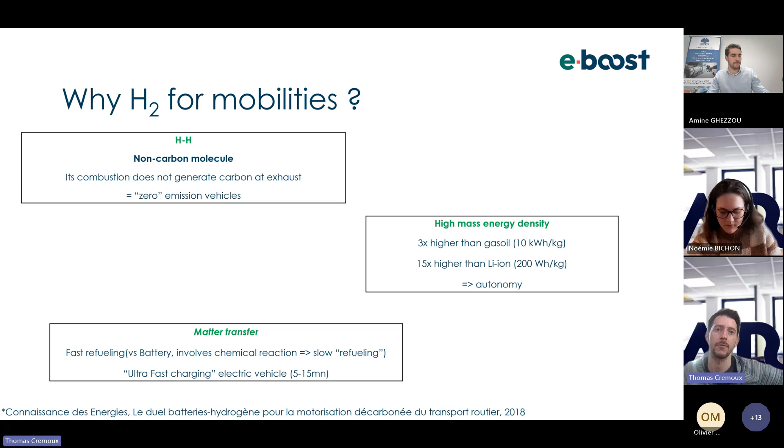These advantages make hydrogen useful for several uses. Hydrogen is not very relevant for light vehicles, except for taxis. But it will be more important for heavy vehicles, as we see on the graphs. Among these heavy vehicles, we have on-road and off-road engines.

And we don't have to forget that we have a part of hydrogen forklift vehicles, which have already been used for many years.

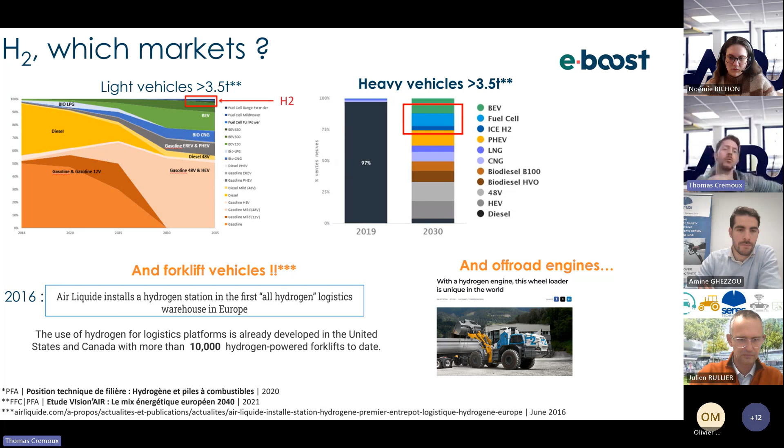But hydrogen has several challenges. The first is it needs a complete ecosystem: production, distribution with pipes, refueling stations, industrial and mobility consumption. It has a low chemical stability. As an example, low ignition energy, 12 times less than gas oil. So it has a chemical energy issue. Moreover, it has a physical energy issue because we have to compress it due to the low volumetric energy density, at 350 bars for example. And finally, the flame is not visible, the molecule is odorless, and the molecule is the smallest possible, so we have micropermeability. So we have to have special processes in industry to manage the hydrogen molecule.

So, with safety in mind, I give the floor to Amine, who will present.

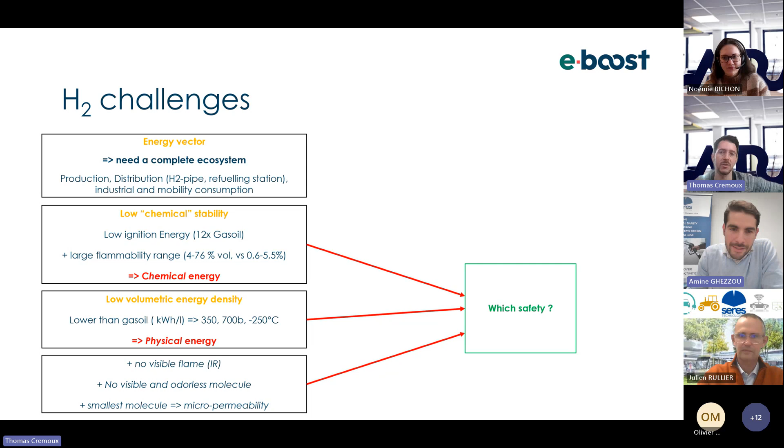Thank you, Thomas. Thank you, Noémie. Do you see my screen? Yes, it's okay. I will put it in full presentation. Is it full screen? Yes, yes, okay.

So maybe a short introduction about ourselves. I'm Amine, I'm a safety leader on hydrogen and automotive applications. I've been working several years on hydrogen storage systems, either on automotive, stationary, machinery, and transport of dangerous goods applications. Actually, I'm a safety leader on fuel cell hydrogen systems, and I'm working at Seres Technologies in the automotive department with Julien.

Hello everybody. So myself, I'm a safety expert on automotive embedded systems, and today at Seres I'm leading the automotive department. I will explain quite shortly what we do at Seres Technologies.

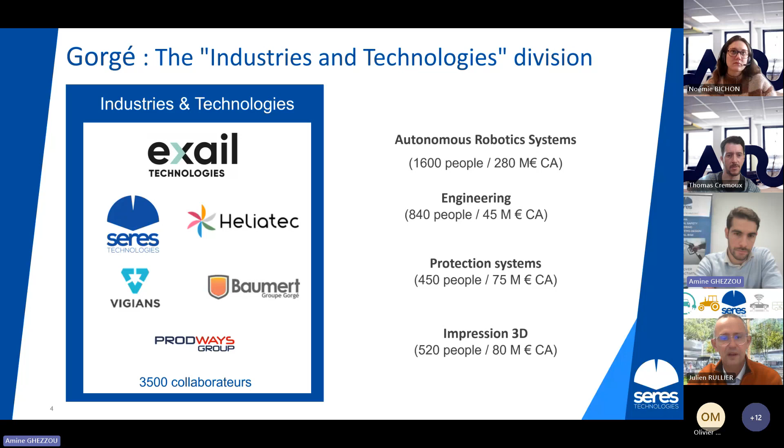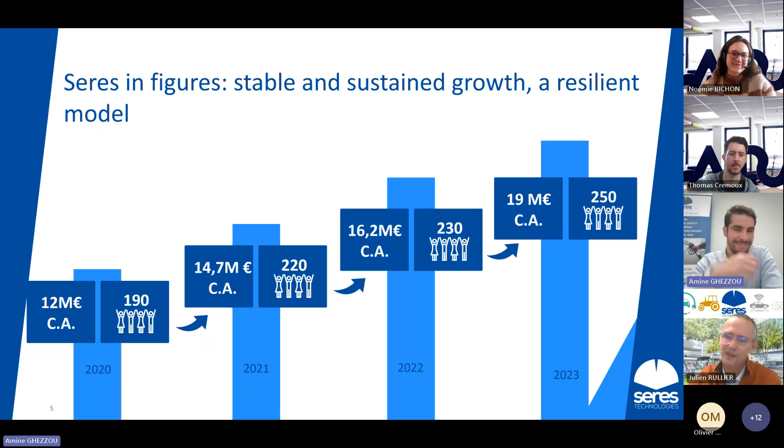Seres is a medium company. We are 250 people, and we are working in a group called Gorgé Group, which deals with industrial companies such as Exail Technologies, providing submarine drones mostly for defense, and Prodways, dealing with 3D printers. At Seres and Heliatec, we are engineering companies. As I said, we are 250 people, and our result last year was around 20 million euros.

We are settled all over French territory, especially in the Auvergne-Rhône-Alpes region, in Lyon and Grenoble, but also in Paris, in the southwest of France, and also in Morocco since 2 years now. We work with major companies and also small companies, startups and new stakeholders in innovative mobility solutions. With most of our customers, we work on safety subjects for electric or hydrogen solutions, either on embedded systems or ground solutions. We are involved in different clusters and partnerships: Cara, of course, but also Pôle Véhicule du Futur and Automotive Engineer Society, Agrotechnopole for agriculture solutions, and IMDR, the Institute for Risk Management.

First of all, a big picture about the value chain of hydrogen. We have different steps where we need to first produce the hydrogen by electrolysis or other methods. Then we need to transport this hydrogen either by train, by trucks, or directly by pipings. The objective is to deliver it to the end user. The end user could be linked to different applications, either industrial applications using hydrogen, or mainly, around the table today, we speak about transport: cars, trucks, buses, trains, etc. So at each step here, we deal with hydrogen.

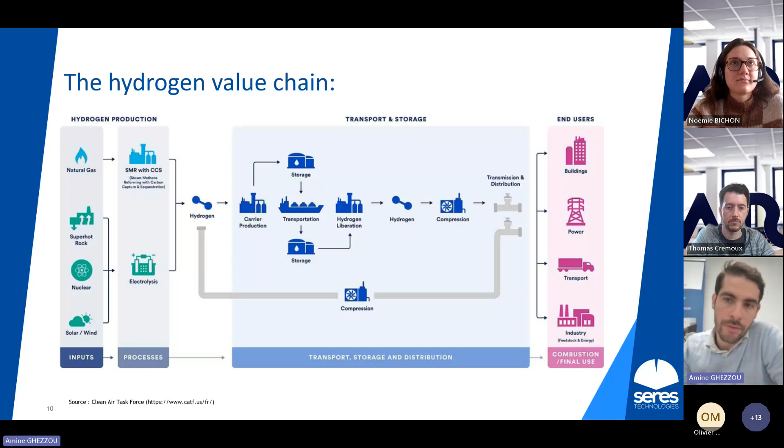So we need to know what are the important characteristics of hydrogen to ensure safety. Here are some points I want to highlight. First of all, we need to know that hydrogen is the smallest atom in the universe.

That makes the risk of leakage present, because hydrogen will leak, will go through a very tiny, small breakage or a small path. So we need to be careful about the risk of leakage.

Then the second characteristic is that hydrogen is difficult to detect because it's colorless, odorless, and tasteless.

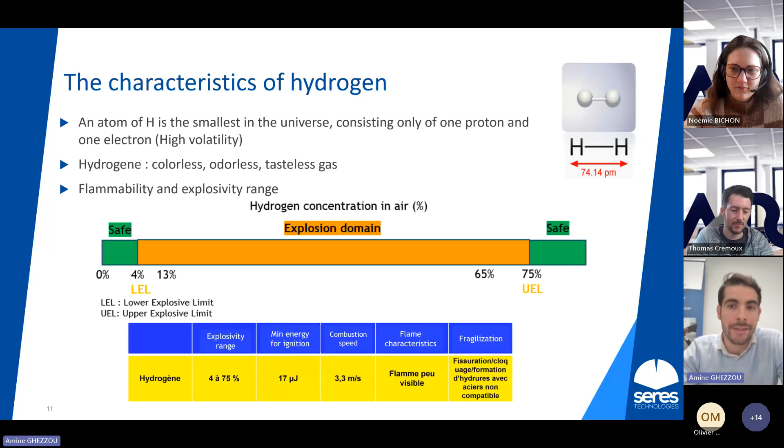So mainly these are the characteristics that we need to know about hydrogen to be able to identify the risks. So the main risk linked to hydrogen, regarding what I said before, the first one is the risk of explosion or jet fire. When the hydrogen leaks and some conditions are met, we can have an explosion or a jet fire. This phenomenon is described by ATEX.

There is an ATEX standard that describes that, and on the picture on the left, we have what we call the hexagon of explosion. It describes what the conditions are to have an explosion when we have in the air hydrogen in gas or spray or something like that, in presence with the air at a proper mix proportion, the 4%, for example, and then in presence of an ignition source, we will have an explosion. There is a last parameter, which is the accumulation or the confinement, that is an aggravating factor.

On the right, just a picture to show what a hydrogen jet fire could look like. This one is huge, it could be a pipe breakage. This is a life situation that we could face in case of crash or drop of a system. There are some technical solutions that we need to assess from a safety point of view, but for example, you have excess flow valves to avoid that the flow rate when you leak is too high.

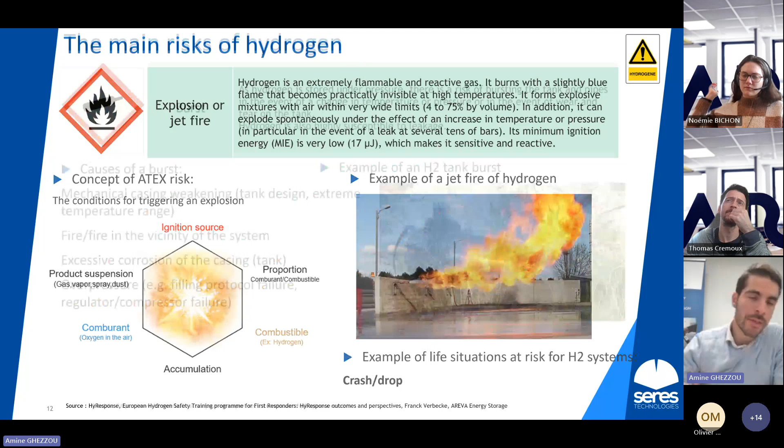The second risk linked to hydrogen application is the burst. This one is not related directly to the characteristics that I've shown before. It's mainly linked to the fact that we transport hydrogen in a pressurized gas situation, up to 700 bars. So we need to be careful about the tanks to avoid the risk of burst.

There are different causes that can lead to a burst: mechanical wearing of the system, maybe by tank design issue, or misuse of this tank. What I mean by misuse is using the tank with a flow rate to fill or defuel that is too high, which could lead to really low or high temperatures inside the tank. This is something that can lead to fragilization of the tank and a burst.

There are some life situations also that could be at risk for the tank, which is the risk of fire. If you have localized fire on the tank, you could also have a burst. Regarding the tank, there is also the topic of corrosion that could damage the tank and create weakenings.

And the last element is overpressure. The tank is designed to work on nominal pressure, maybe to resist a little bit more, but we need to ensure that there is no failure on refueling stations. We need to ensure that there are mechanical barriers to not have a higher pressure value. There are some protocols, SAE J2601, for example, for the refueling station to ensure that we don't cross the limit of the tank.

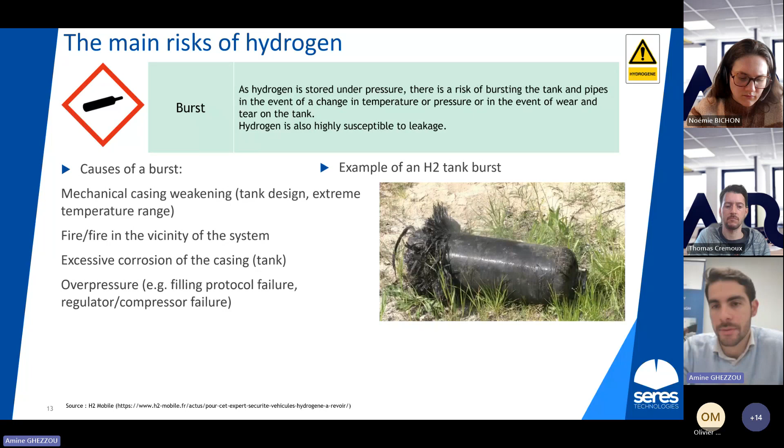And then some other risks, without deep diving on them, but important to know. The first one is the risk of anoxia, meaning being in an environment where you don't have enough oxygen or air to breathe. This could happen in a closed area where you have hydrogen leakage inside a car, for example, if there's no ventilation.

The thermal risk here is linked to some applications when we speak about liquid hydrogen applications, not pressurized gas hydrogen. We need to have the hydrogen at very low temperatures. In case of leakage, we could burn surrounding people.

Then the last point is electrical risk. It's an indirect risk, not linked to the hydrogen characteristics, but in our hydrogen applications we have fuel cell systems, for example, that generate electricity thanks to hydrogen. So we need to ensure no short circuits and no electrocution of surrounding people.

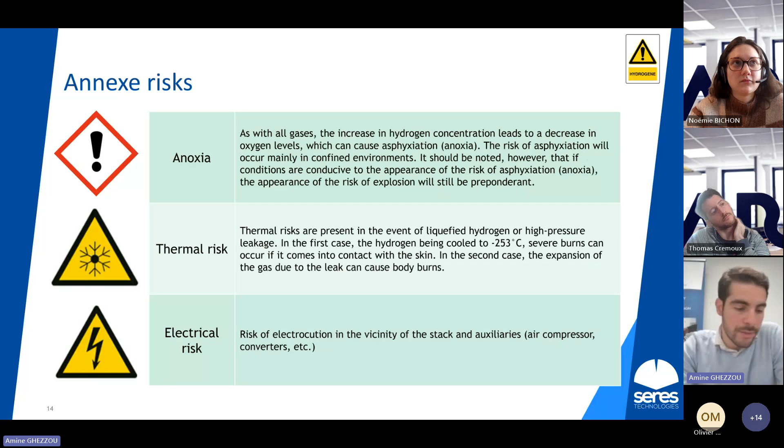So this is a general overview of the risks that we have using hydrogen, but how can we ensure that at the end we have a safe product that we can commercialize? For that, there are methodologies, there are tools, and there is functional safety to help us identify the risk and manage them.

But these regulations cover some design rules, some elements that we need to prove to get the homologation from the authorities, but it doesn't cover the complete risks that we could face in an application. To do that, we need to use functional safety standards, which I will describe in more detail after. But one thing that's important to know is that if we want to have a homologated system and a safe system, we need to do both activities: regulation and safety.

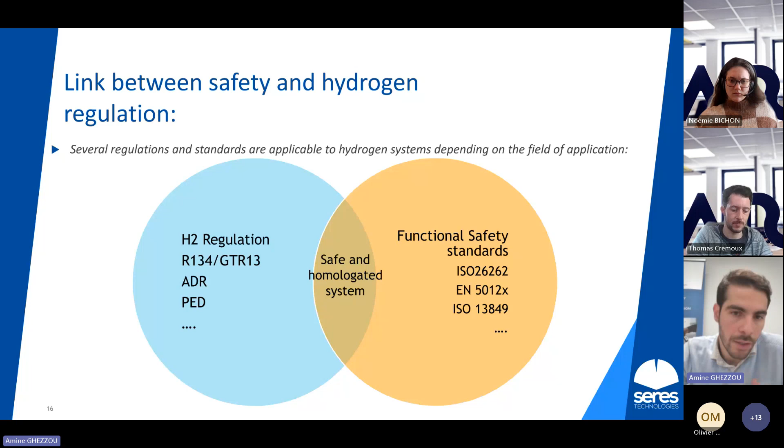So what is functional safety? We try to describe it as a process: identifying the risks, having a clear description of them, having a rating also, since not all risks are dealt with at the same level, having mitigations in front of each risk, and validating the fact that these mitigations reduce the risk.

The functional safety has two challenges or two aims. The first one is to ensure that the product we are designing, that we are building, is safe. And the second objective is to provide evidence to the authorities that the manufacturer, the OEM, has done all the proper steps, all the proper activities to ensure that the product is safe.

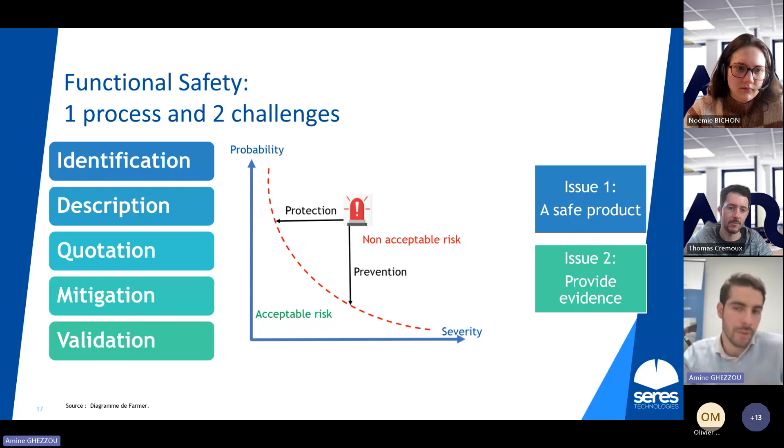One element that is really important when we speak about functional safety is the robustness of the safety functions. And here we will speak about safety integrity level.

The idea here is to say that not all the risks will be dealt with and managed the same way in a project. For example, if you pinch your finger in a window, it could be painful, but the impact or damage will not be critical. Another example is speaking about braking systems or steering systems. If you have a failure on those systems, the consequences could be really severe.

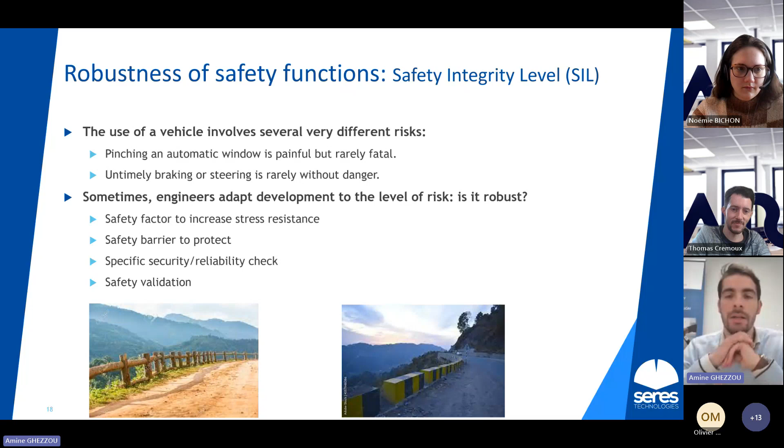We need to ensure that we have the ECU that reads the information at the right speed and sends the order at the right speed to a solenoid valve that has closure and timing characteristics. So this is about

safety integrity level. Coming back to the functional safety standards, we have here a list of different functional safety standards according to the application domain. Let's take an example of a hydrogen tank. If you use this tank in an automotive application, you will need to use ISO 26262 to develop safety activities. If it's a stationary or machinery application, it's 13849. For railway application, you have the CENELEC standards, etc.

We have different standards and different names and numbers here, but the approach is quite similar. The objectives of these standards are to define a common design and a common process to assess the safety of the system, and it also helps OEMs, suppliers, manufacturers to have the same references and the same language when we speak about safety.

We have on the bottom side of the slide an example of how we rate the risks and how we define SIL, ASIL, or PL. SIL is for safety integrity level, ASIL is for automotive safety integrity level, and PL is for performance level, depending on the standard. It's the same approach.

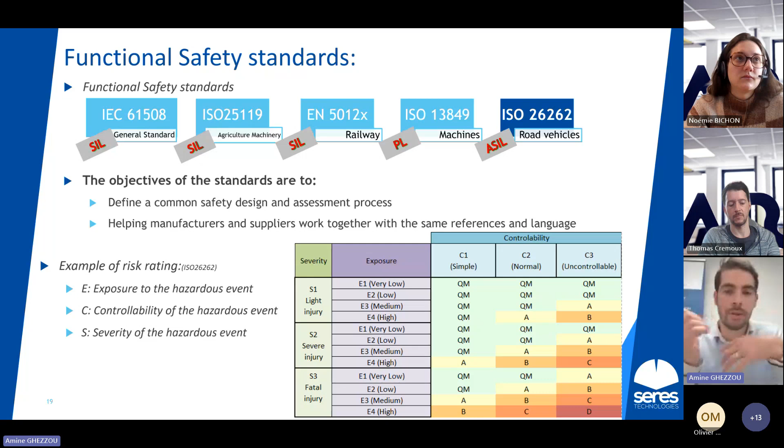And then in all the other situations, if we are able to prove that the exposure is lower, the controllability is better, and the severity is lower, we can have a lower ASIL rating. It's really important to define the SIL or the ASIL at the right level, because one thing that is important to know when we speak about safety is that the SILs have an impact on both project and product.

On the project side, depending on the ASIL that you have, you will have an impact on the activities that you need to do. If it's QM or if it's ASIL D, you will not have the same activities and deliverables. It will have an impact on the planning of these activities, and on the organization of the team also. You will need to have a safety manager on the team, and an independent safety assessor that assesses the deliverables.

And in general, not only speaking about safety engineer or safety manager, the safety skills and the safety awareness of all the team members need to be adapted to the SIL level that we have on our product. Then the impact on the product itself: because we have a high SIL, we will define characteristics and requirements on the technical aspect of the component.

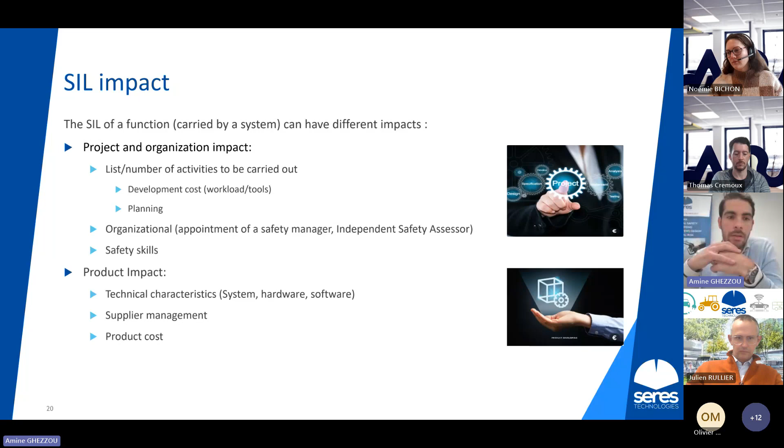We need better hardware, software, materials, etc. We need to deal with a supplier about safety activities. So there is supplier management that needs to be carried here, and at the end, cost impacts.

One slide about what we call a safety plan. We wanted to give you an overview of the activities that need to be done when you have safety topics on your project. This is a document that needs to be built in the beginning of the project to know what to do, who does the activities, and when. General overview on the chapters.

You need to define the safety organization of your program. What are the roles and the responsibilities of everyone? How the meetings will be done. Having a clear description of the technical project, the scope, the P&ID, for example, when we speak about the hydrogen systems, the architecture, the standards that we need to apply.

Then the step 4 on the top, the picture is bigger. It's because here we have the list of deliverables. The list is not exhaustive, but here you will hear document names like item definition, HARA, hazard analysis, to identify the risks and to assess them, FMEAs, the process, system, design FMEAs, and then some specific deliverables that maybe we don't use.